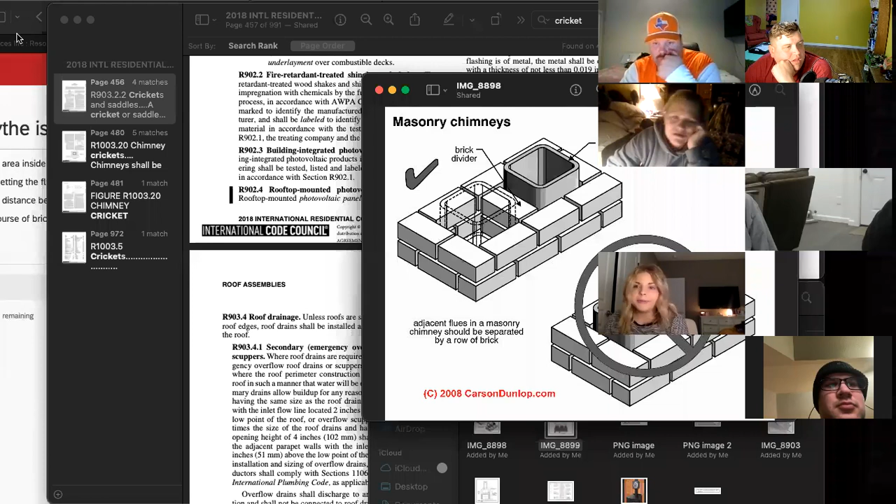So a withe is a divider, a brick or non-combustible masonry divider between flue tiles. Right. So we're gonna select the last one here: a course of brick separating flue tiles.

Within a chimney. Hang on one second. Oh, get out of here. Go. Well, let's see if y'all get this one right.

All right, when a round flue is used for the lining of a fireplace chimney, the proper fireplace opening to flue size ratio should be... okay, you know the answer, Cody?

Hang on, I already know the answer. 10 to 1. All right, let's see. But Corey, do you have the NFPA digital pulled up? No, but I can get it real quick. Hold on, I think that's gonna be 10 to 1.

Did somebody say 10 to 1? I did. You're close. 12 to 1. Yep, I know, I deal with this all the time. What do you want me to do with it?

Look it up. So yeah, we want to look up the round flue lining size. Round flue lining is 12 to 1. Square is 10 to 1. Square with a 2-to-1 ratio is still 10 to 1, and rectangle with anything more than a 2-to-1 ratio is 8 to 1. 18 to 1 doesn't exist. Wow, look at you go.

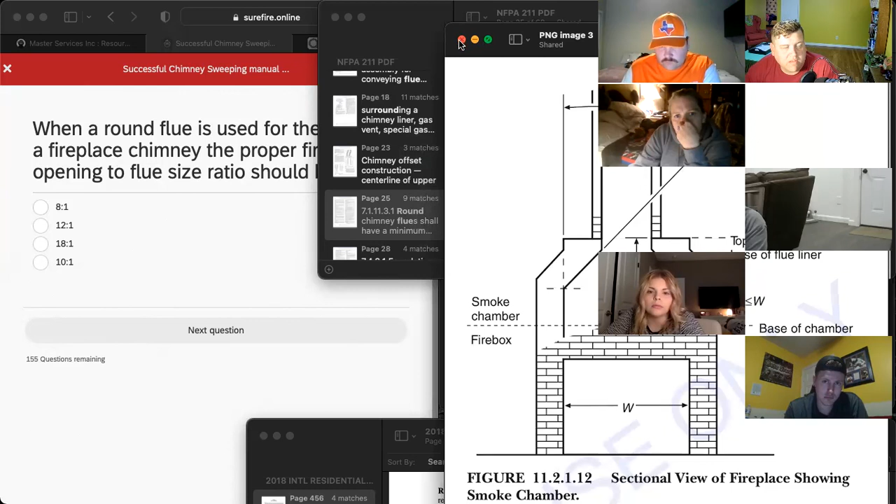So if we are measuring the width of the fireplace and the height of the fireplace, we need a minimum cross-sectional area of the round flue tile to be 1/12 that size. So we will go 12 to 1 on the ratio. Next question.

Okay, where unlined, the smoke chamber walls shall be what thickness? So with a lot of these, the actual question is posed just like it is in the books. So you can literally come back over to the NFPA and type it in. I think it's 8 if it's lined and 10 if unlined, or 6 if it's lined, 8 if it's not lined. I'm pretty sure it's 8 and 10.

Oh no, oh wait, let's see here. So, find it.

Surfaces of the smoke chamber. Where unlined, the smoke chamber... I literally just started typing where unlined the smoke chamber, just like in the question. And I had to find this one, which took a few seconds: shall not be less than 8 inches thickness. So that means lined is 6.

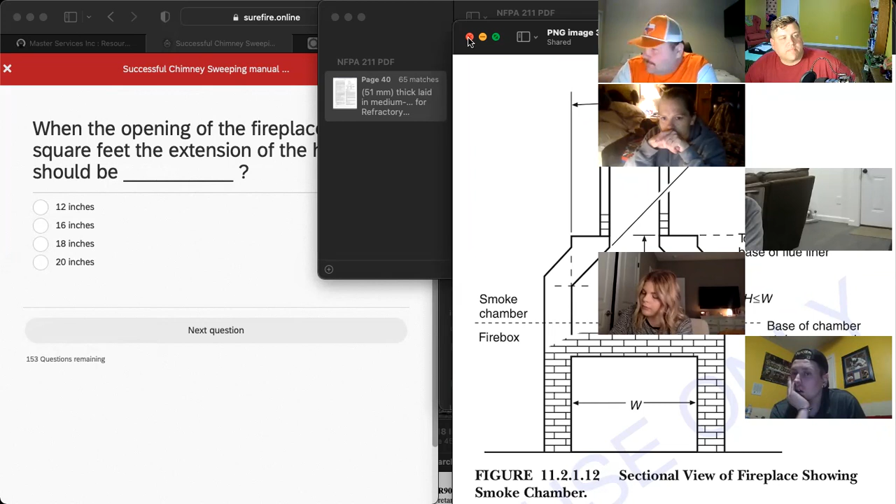So what that is stating is that when the smoke chamber is not lined, the thickness of the walls has to be at least 8 inches, which is this area here. This and this both need to be a minimum 8 inches thick if it's not going to be lined with some kind of a smooth liner. Or it's 10, but that's talking about the back. That's what I screwed up.

So when the opening of the fireplace is 6 square feet, the extension of the hearth should be how many? If it's exactly 6, is it 16 inches? No, because the first one says equal to or greater than. Oh, I see it. Yeah, so it's 20.

20 and 12, or 16 and 8. It's 20, right. 20 out and 12 to the sides, at the top opening of the fireplace, when it's 6 square feet, the extension of the hearth should be that.

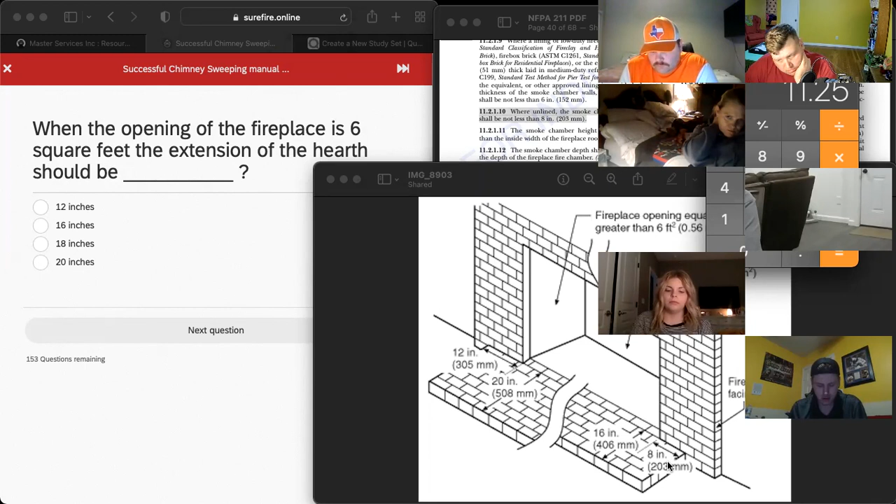Look at the picture, it makes sense now. Yeah.

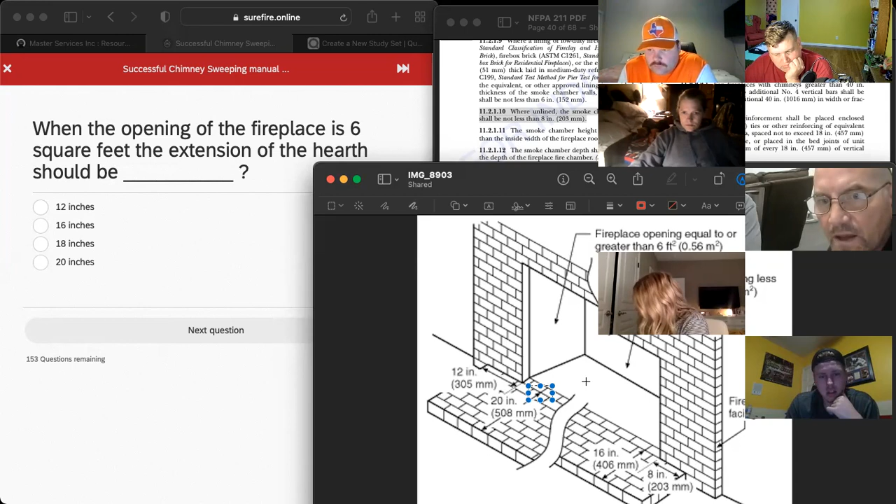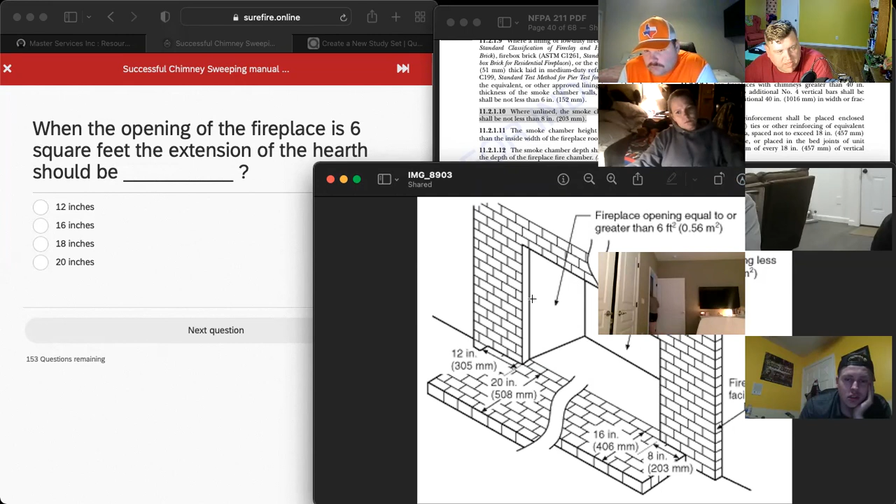Does that make sense? Yes sir, that's what I needed to clarify, so I knew exactly. That's the fireplace opening extending through that facade brick. The opening is not official until it breaches the facade brick at that point. So we're not starting at the firebox floor inside the firebox, we're starting level with the firebox opening.

All right, thank you. Does anybody else have any questions? Nope. Okay.

So we said the answer: the inner surfaces of the smoke chamber shall not be inclined more than 45 degrees from vertical. True.

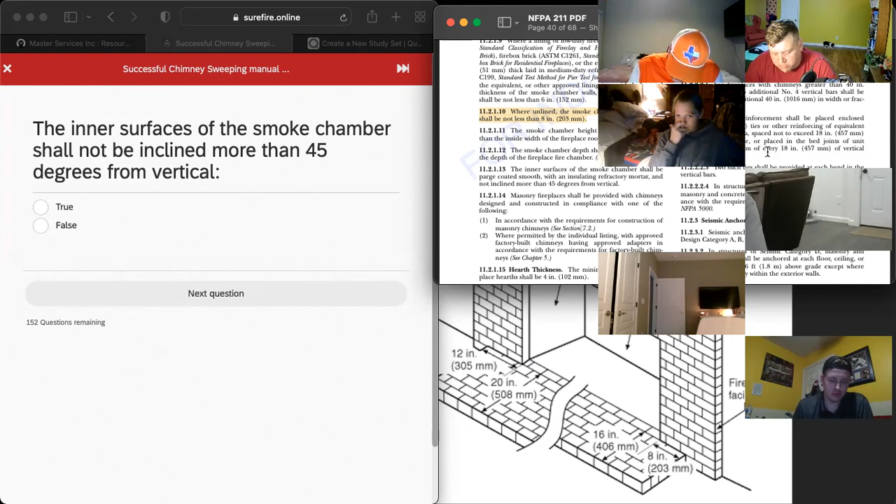You can just go right back to the NFPA, and we want to know about smoke chambers, right? That's the general topic. You can search direct topics, or look for general topics, and we want to look for a diagram. You can click quickly through this diagram. What does that diagram show us?

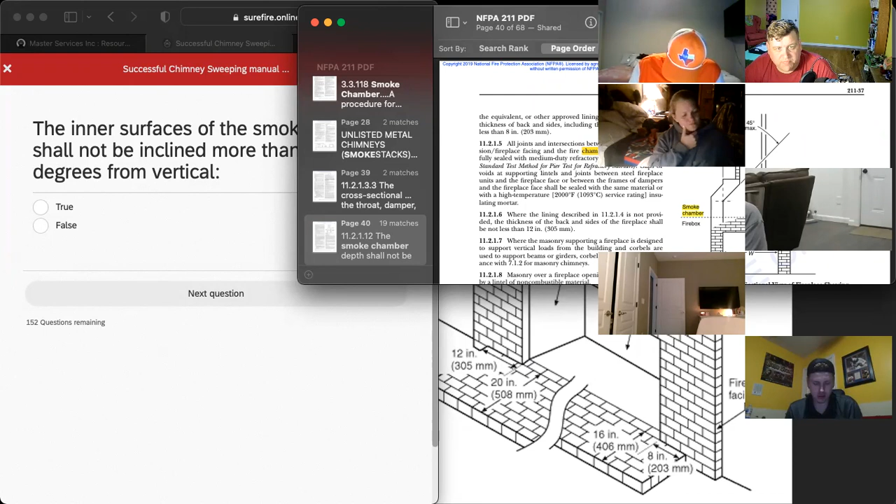Here's a blown up version of the same picture. So the max is 45 degrees, right?

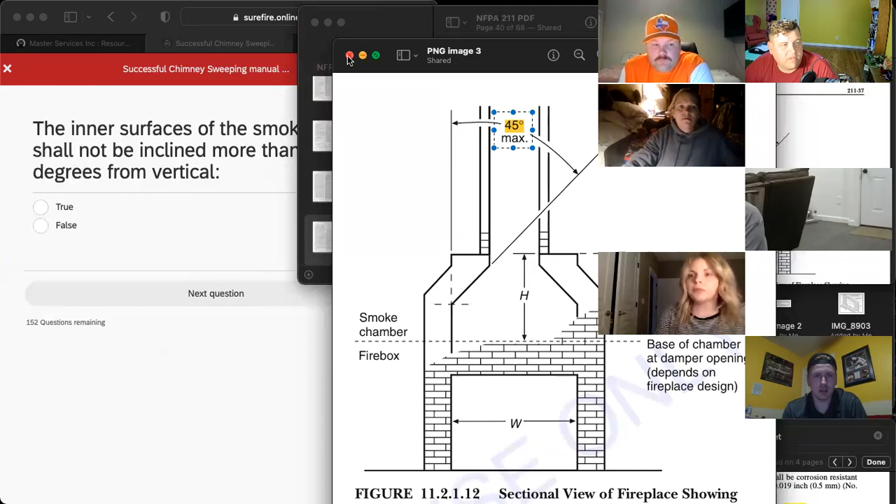So over here, the inner surface of the smoke chamber shall not be inclined more than, or if you want to read it a different way, to the maximum of 45 degrees. So true or false? True. Bam.

Okay, a level 2 inspection includes inspection of accessible areas of attics, basements, and crawl spaces. Educators, stay quiet.

You've got to remember everybody likes Roman numerals, but right here on the screen you can see level 2 inspections, and that is 15.4. So let's do this the hard way.

We can just scroll straight through this, and that was right there at the very beginning in the glossary. Where's that? This is right here at the contents. Chapter 15, inspections of existing chimneys. 15.4 covers level 2 inspections, that's right there.

So we just need to scroll to 15.4.

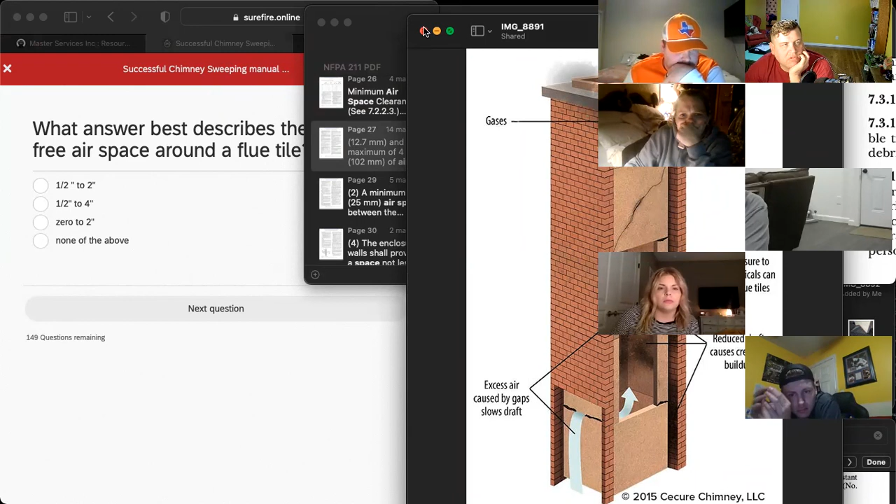So this is saying that the actual flue lining itself... so it's a terrible one to use, it's good down here at the bottom. But the actual flue lining, in this case the terracotta tiles, need at minimum a 1/2 inch before the masonry, but no more than 4 inches. Is what that is stating. We really don't want the masonry right up against the terracotta then.

Right, and do you know why? Well, that was gonna be my next question when you said no. Yeah, that's not a good picture. So the reason why is, let me go back to this one here. Let me get this one back up here for you.

So the reason why is that we're venting all of the excess heat, creosote, noxious gases, everything else. So as the heat is rising, these flue tiles are going to heat. Number one, the flue tiles are going to expand a small amount, and that amount that they expand, it needs an air gap to allow them to expand without hitting any masonry. So, number one, they're going to expand and they need room to expand.

Makes sense. Number two, the air that flows around them. I don't understand that part. That makes sense. So the air that flows around those flue tiles is going to help cool the flue tiles so they don't build up an excess of heat.

If the brick were right next to the flue tiles, less than a 1/2 inch, and you did have a flue fire, the flue tile could heat up to the point at which it's glowing, which means that it could heat the brick up to the point at which it's glowing red. And if that's at the point where the chimney is coming through the roof line, it could ignite the composite shingles or the wood frame of the house.

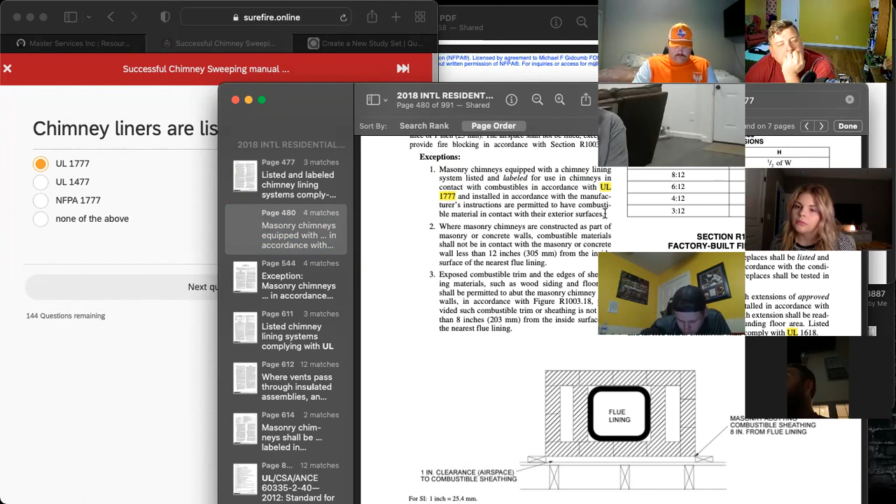Okay, yeah, because when I Google searched it, it basically says that all stainless steel flue liners are UL listed or tested to the UL 1777 standard, which means they have been subjected to a series of tests, including three 10-minute, 2,100-degree burns. Steel flue liners will withstand exposure to a chimney fire for a short duration, but can become damaged in long burning fires. That's what I get when I Google it.

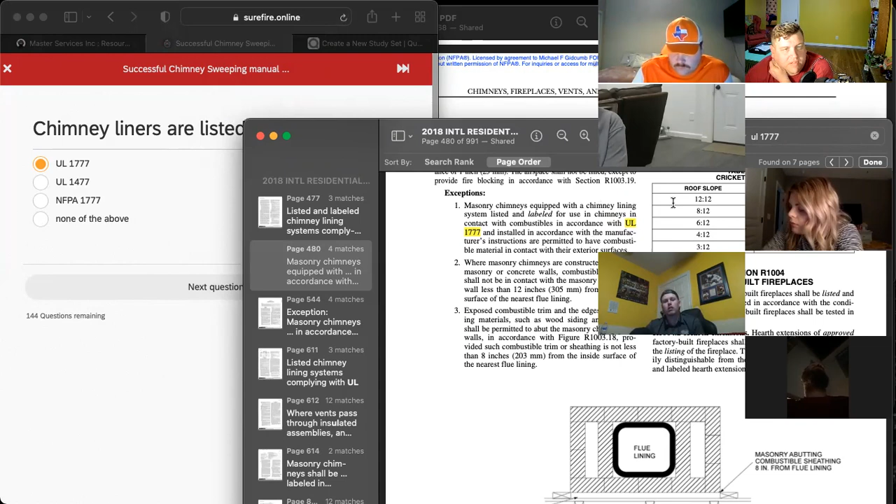So you're going with UL 1777. That's what I got. And so if you type it into the IRC, it literally, the second one that comes up, talks about chimney linings that come into contact with combustibles in accordance with UL 1777. Yeah, that's the exact same right there.

Okay, who has a question? Well, I was looking at chimney tests earlier, on Surefire, and they were talking about the difference between stainless steel and galvanized. So I was just wondering if they're talking about stainless steel or galvanized, or if it even makes a difference, if it's all the same code.

If it's going to be in a Class A chimney, which means any chimney that can burn solid fuel - could be corn, pellet, or wood - the flue lining has to be made out of stainless steel. In B-vented units or oil burning furnaces, it can be made from galvanized steel, or it used to be able to be, depending on what gauge it is, or aluminum. So in your B vents and direct vents, they'll use aluminum. And anything that's going to be burning solid fuel has to be stainless steel.

Okay. Hey Cody, solid steel, stainless steel. Yeah, we looked this one up earlier. L vents were the ones that were stainless steel, and then B vents were the ones that were aluminum, correct? Yes, or galvanized, yeah.